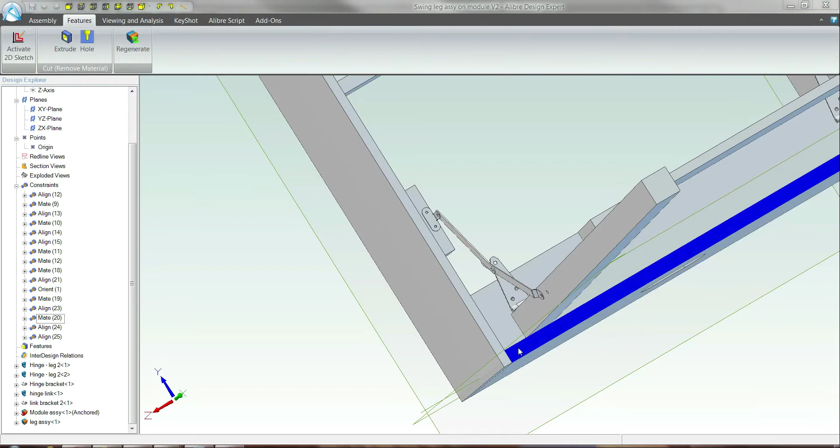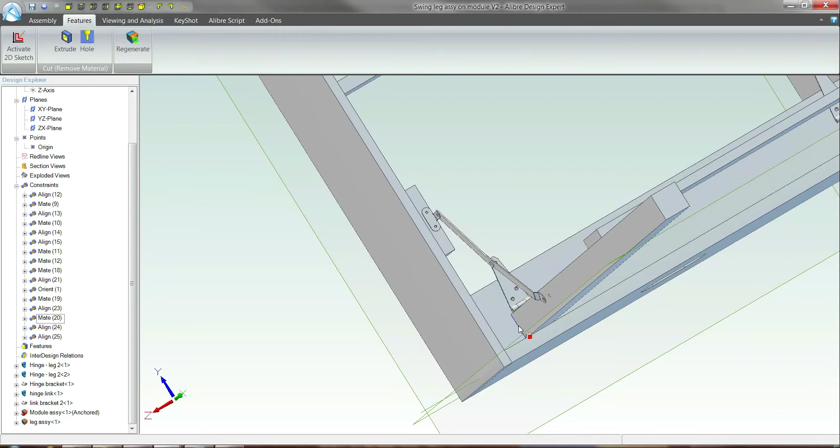So basically, this that we're looking at now is the edited V2 version that I shared with you yesterday. I have moved the leg down, so when it's up in the 90-degree position it's a little difficult to see, but you can see it comes flush with this 2x4, and we're at the 45-degree angle, and our hinge point is mounted here.

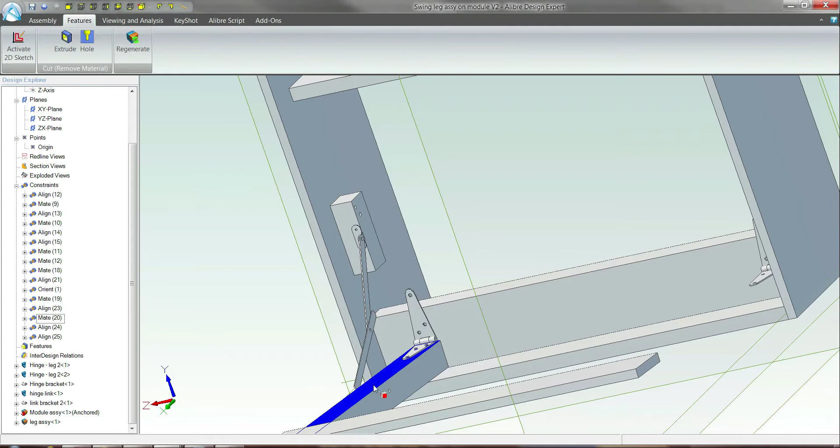Put it on the module. Now I need to just check immediately here, so that's braking in the right direction. I don't have a constraint to make sure that it brakes the right way. And if we do show it to the other guys, this leg on this side of this end of the module is hidden in this view, just so that we don't have anything in the way.

And I've also moved the hinge from inside the leg to the outside of the leg based on some photographs that I took at Stretch's place yesterday.

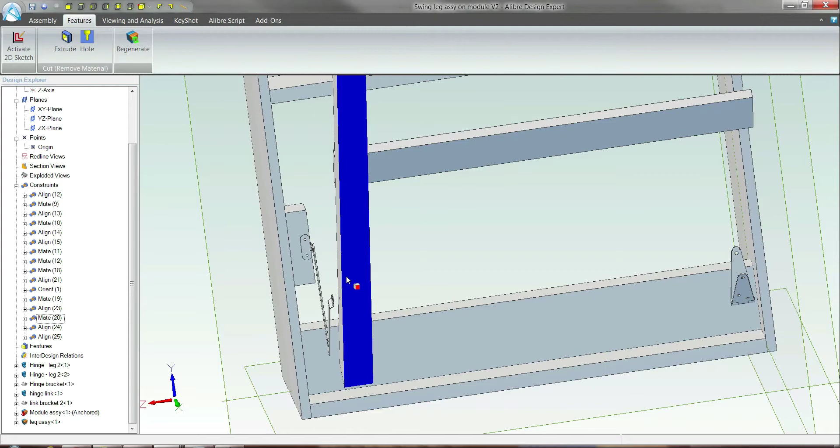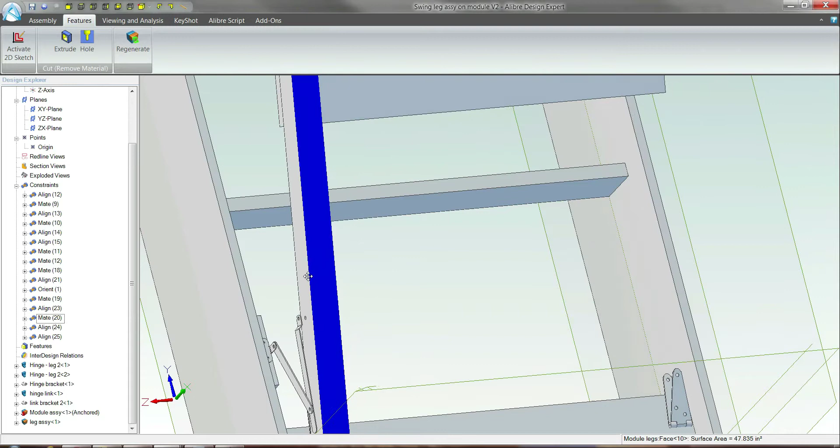I haven't worked on the width of this block to close up this gap, apologies. But the hole on this link is tracking the hole in the leg exactly. So the fact that it's off by a quarter of an inch or something is just a matter of pushing this block out.

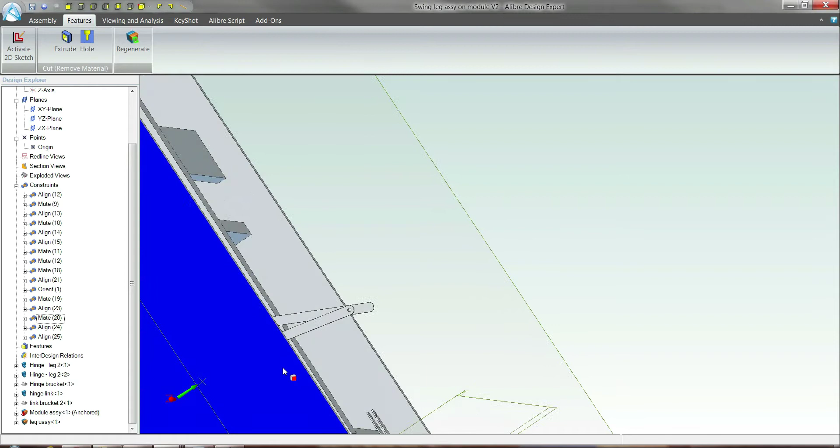So we can see here that as we close that leg up, the hinge is sticking out below. And it seems to me that a lot of the hinges on the guys' modules do not do that. So I'm still in a bit of a quandary as to why that is.

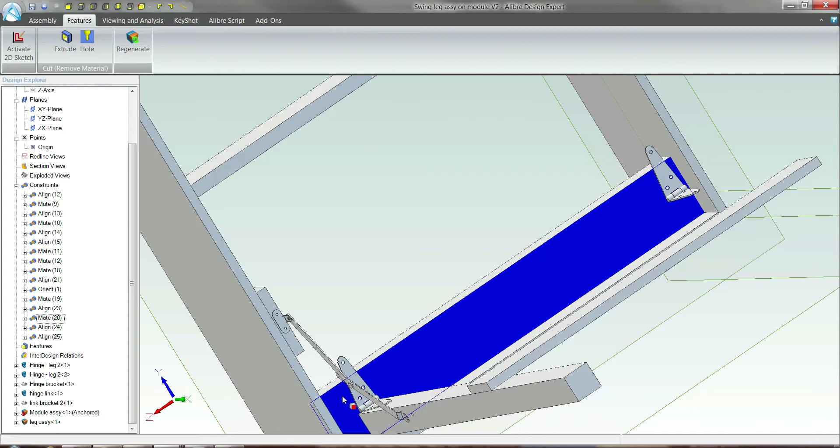Anyway, swing it up, and having done three versions of this, it struck me, and in the end I'll show you, that we could make a fixture that basically holds this thing at its 45-degree angle and locates off this face, which is where our hinge is fastened, and we can slide that forwards and backwards to position this hinge point and this hinge point.

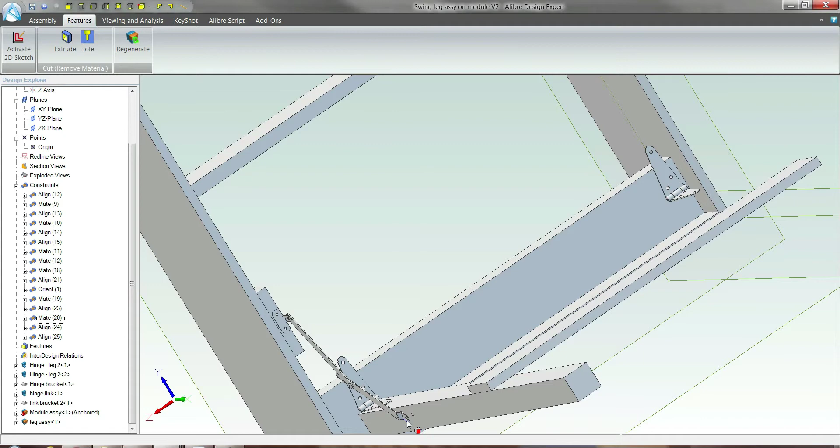And get them all marked, because once we've got this held at 45 and located in this plane between this blue face and this blue face, they're all on the same plane as is the top of this hinge. We should be able to hold that in place and mark these two holes and this hole and drill it out. But let me move on here to version 3.

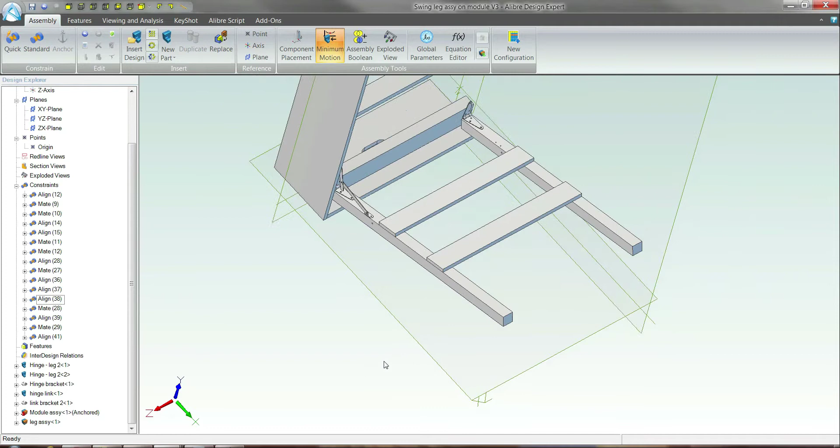Okay, so here we are with version 3, which Scott, you asked for, and this is flipping the hinge the other way. So if I get this in a decent place to look at - version 2 had this bracket down at the inside the module, and the pivot point fastened on the outside here. And now we've done exactly the opposite. The pivot point's on the inside of the module and this hinge is on the top.

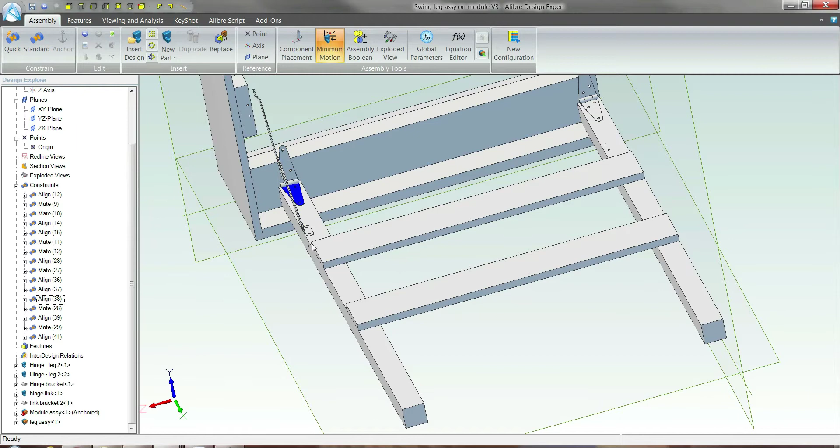Confirming with the hinge in my hand, it collapses by breaking inwards. So that's exactly what it's doing. And the effect of that is that the hinge then collapses and hides inside the module, whereas the previous one, the hinge stayed below the module.

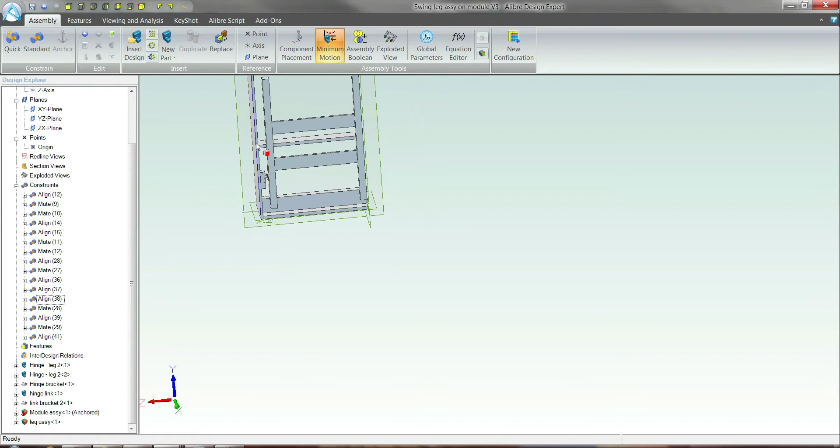It stuck out. And then you wanted me to look at also version 4, which - have I got the right one here? No, I don't have it.

This is version 4, where we had - you asked what we were building on Sunday, where we started to fasten the hinge onto the cross member. And so it's certainly possible to do that, as we'll see here. And it just pushes everything up.

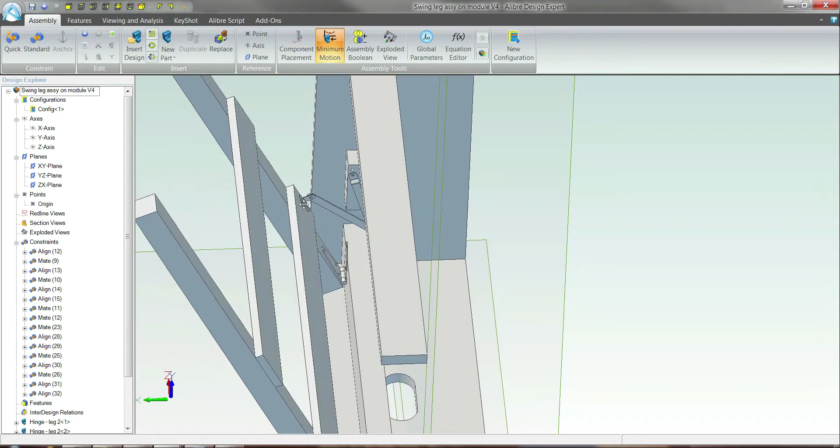So when this collapses down and then goes up and in, everything works fine.

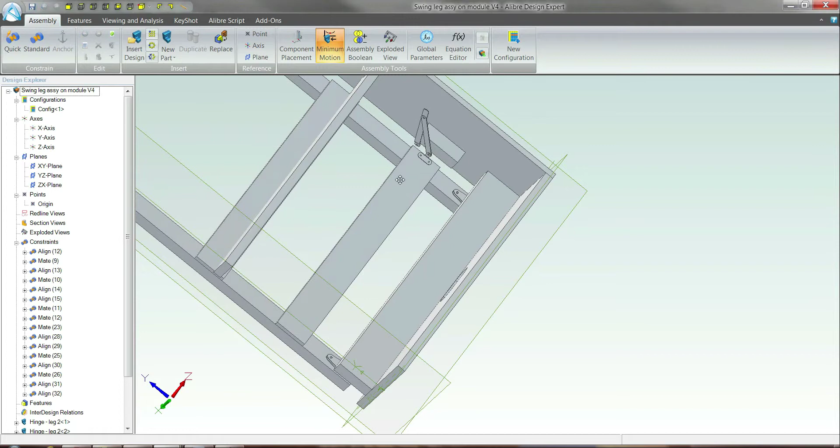So both of those solutions would give us a hinge hidden inside the module. This one, you can see it looks like we get some - we miss there. We should miss that block. So we get no interference there at all.

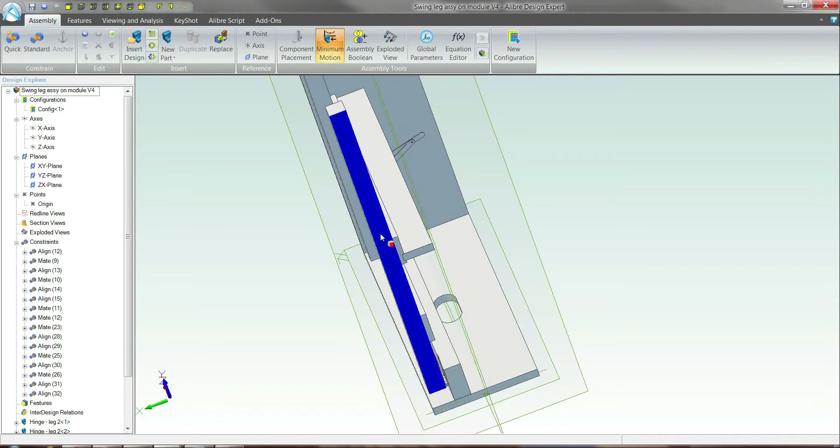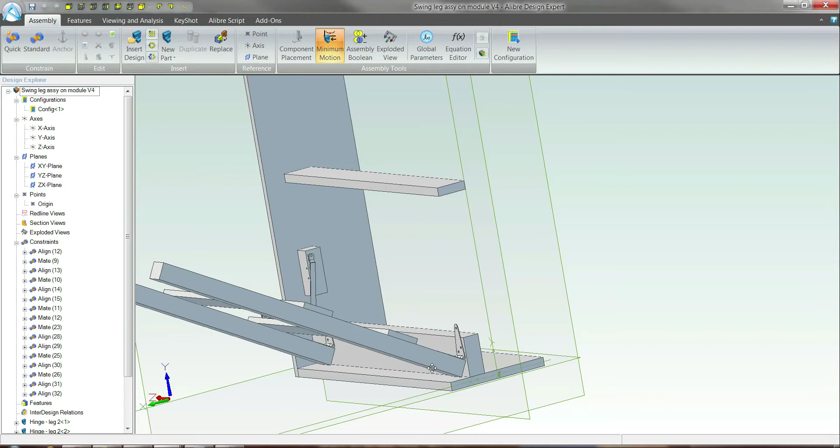So in doing these, I started to understand, visualize the geometry of what's going on here. So we have this dark blue plane that we screw the hinge on, and the leg pivots around on the hinge point here to be in the 90-degree position or in the closed position. And our hinge needs to sit in the fully stand-up position at 45 degrees to this plane, which we started working with on Sunday there with a 45 angle.

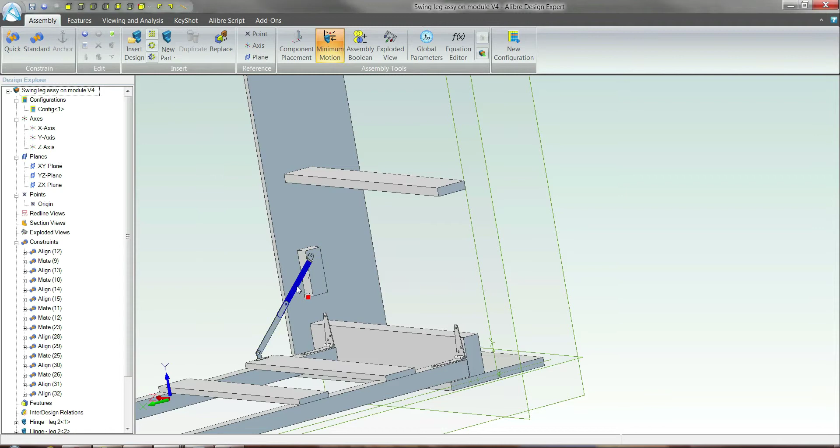And I just realized that if we could hold this thing at 45 and reference this plane, and these two surfaces, at least the way I've drawn them, are meant to be pretty much in the same plane, and we can be within an eighth of an inch, it's not going to matter too much.

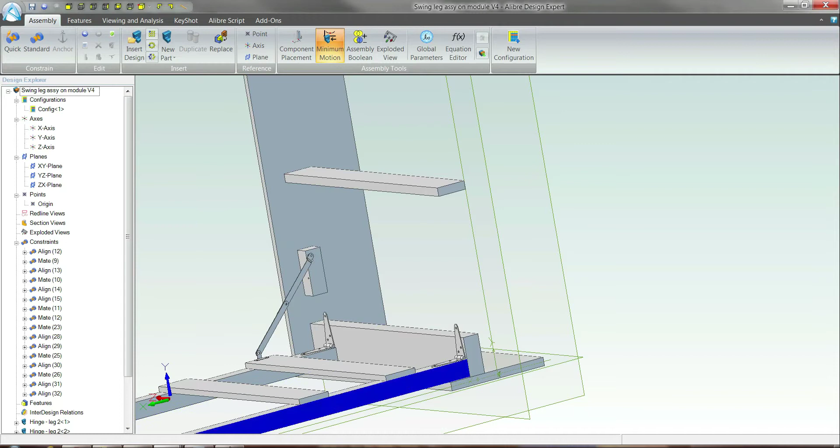So if we designed a fixture that would enable us to hold this at 45 and register on these two planes, we'd be able to mark out these holes, and we'd be able to move ahead quite quickly. So I jumped to this drawing here, and in the 90-degree position with my CAD, I was able to sketch in a triangle.

And I would envisage I could cut this thing on my laser cutter and then scribe it at 45 degrees every eighth of an inch or so, which will enable us to slide the hinge forward or backwards and still know that we're pretty much at the 45 angle, and be able to mark out the holes.

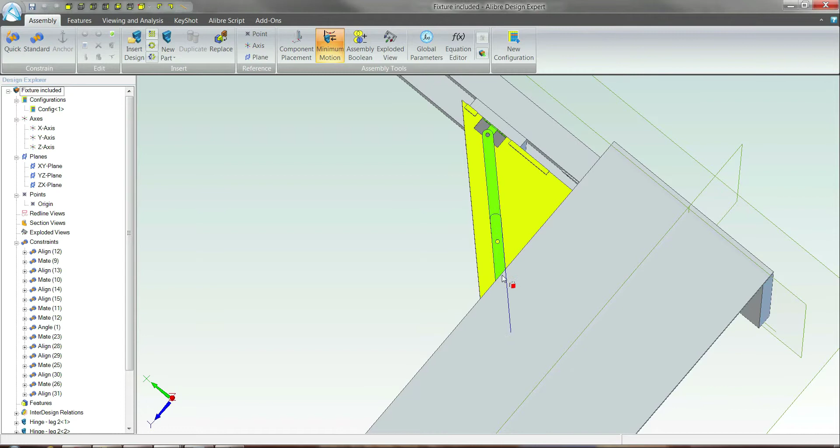And these tabs here enable us to register on whatever surface. This surface is the bottom of this, and this surface, as you can see, it's all one plane. So I think that would maybe simplify things.

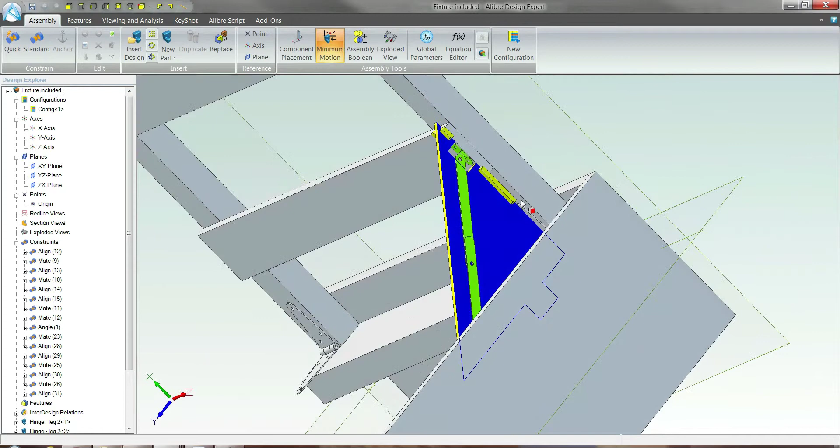I'd just pull that out as a complete sketch, and I put this tab here, which we may or may not need. It just falls between the 2x4 here and allows enough space for us to slide this forwards and back, or up and down, and then forwards and backwards.

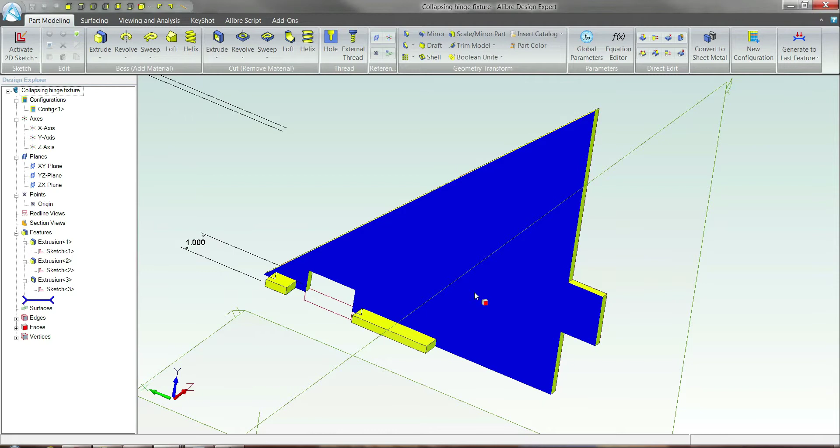Anyway, let me know what you think, and we can take it from there. I think by flipping that hinge, we get all the arms tucked up in the module, and I think that's a good place to be. Thanks.

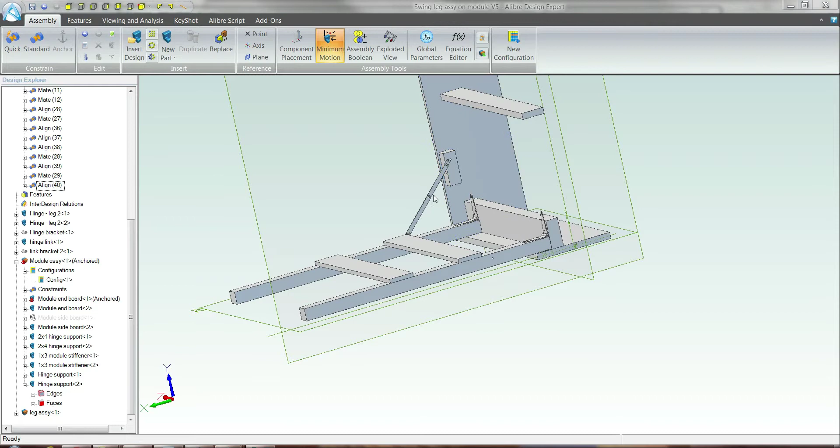Hey Scott, so I've just explored moving this block both below this plane and then above. So as I moved it down one and three-quarter inches below this plane, it didn't really help me because the long link is on the top here and it swings right through this 2x4.

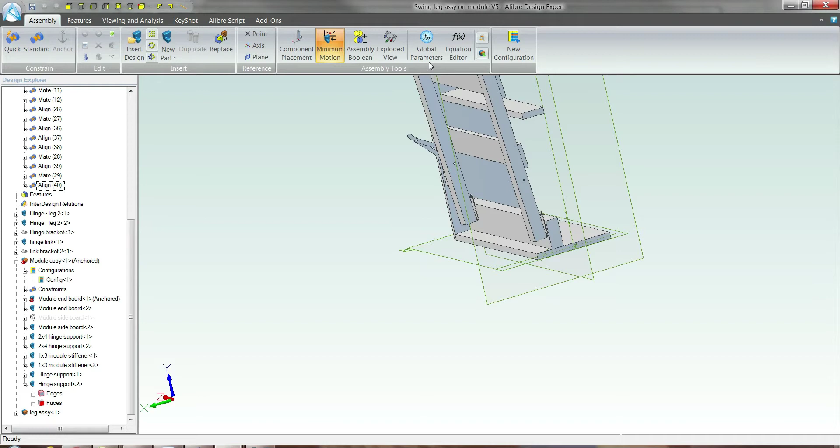But by moving it one and three-quarter inches above the plane, as shown here, you get a more complex hinge motion. It does quite a loop here, but it comes close to tucking out of the way.